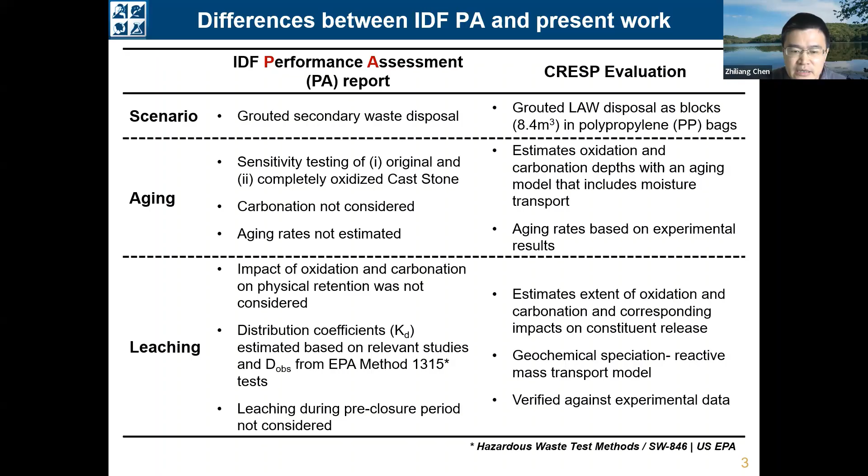So this is just a brief overview of the aging and leaching experiments. For the aging of the Cast Stone, the samples were put into containers and then maintained under different aging conditions for different periods of time. And the aged samples were then used for the leaching characterizations. And based on the experimental results, different models have been developed. And more details regarding the model development can be found in these several papers that we have published.

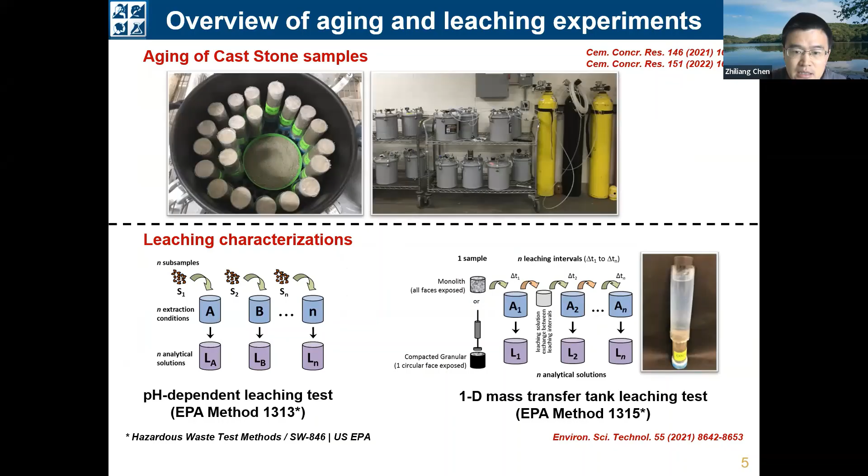And specifically for the aging model, we first developed a drying model to describe the moisture transport between the Cast Stone and the environment. And then we further incorporated the diffusion of oxygen and CO2 into the drying model to develop an aging model. And finally, by extrapolating the aging model with the input of the aging conditions in the field scenario, the aging model can be used to estimate the long-term oxidation and carbonation depths.

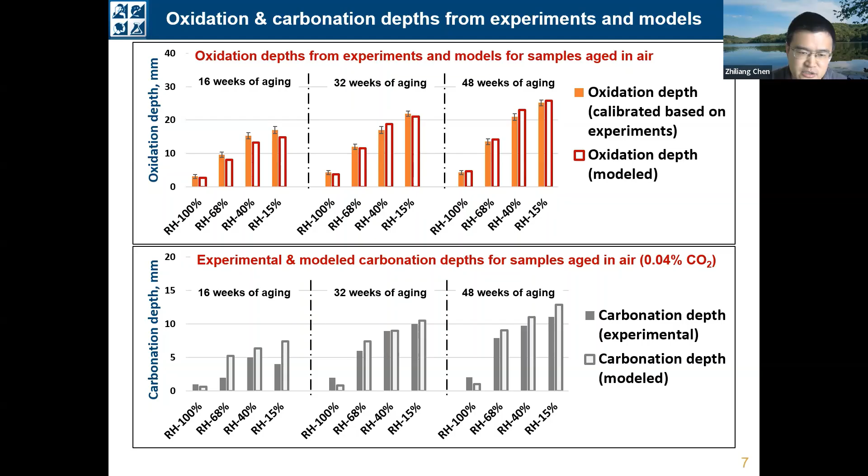And here are some comparisons of the oxidation and carbonation depths from experiments and from models. So at the top are the comparisons for the oxidation depths, and the results at the bottom are the comparisons for the carbonation depths. So as you can see, the modeling results agree pretty well with the experimental results. So that means the aging model that we have developed is well capable of describing the aging processes, including oxidation and carbonation under different aging conditions.

So now we have developed a representative aging model and also a geochemical speciation model. But to estimate the long-term performance of the Cast Stone under field conditions, we still need the aging and leaching conditions of the Cast Stone under the field scenario. And for the IDF at the Hanford site, the Cast Stone will generally go through a pre-closure period for 50 years and a post-closure period for 1,000 years.

And under the pre-closure scenario, the aging condition is assumed as ambient air with low relative humidity of around 54%. And the infiltration rate is estimated as 12 millimeters per year because at this stage, there's no cover at the top of the facility to prevent the infiltration. And under the post-closure scenario, the aging condition will be changed from the ambient air to the soil gas with higher concentration of CO2 and also higher aging relative humidity of around 100%.

And specifically for the early post-closure scenario, the infiltration rate is only 0.5 millimeters per year because at this stage, there is a functional cover at the top of the facility to prevent the infiltration. But for the late post-closure scenario, the infiltration rate will be increased from 0.5 to 3.5 millimeters per year because of the degradation of the cover.

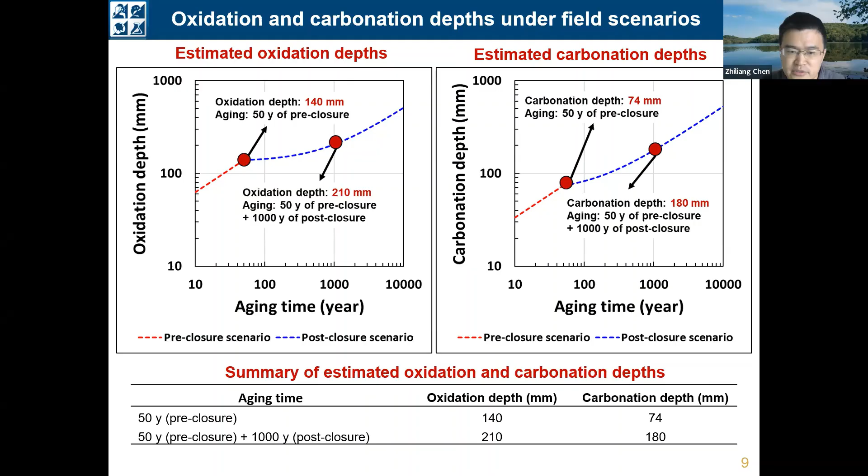The major reason for that is under this pre-closure scenario, the aging relative humidity is only 54%, which is lower than the aging relative humidity under the post-closure scenario. So lower aging relative humidity will facilitate the moisture transport out of the Cast Stone and also facilitate the ingress of oxygen and CO2 into the Cast Stone. So the aging rate under the pre-closure period is much faster compared to the post-closure scenario.

For iodine, we in fact investigated two different systems. On the left are the results for the system without the iodine getter, and on the right are the results for the system with the iodine getter. The getter is assumed to be a silver-containing compound because silver will precipitate together with iodine to stabilize the iodine. So we have some key observations here.

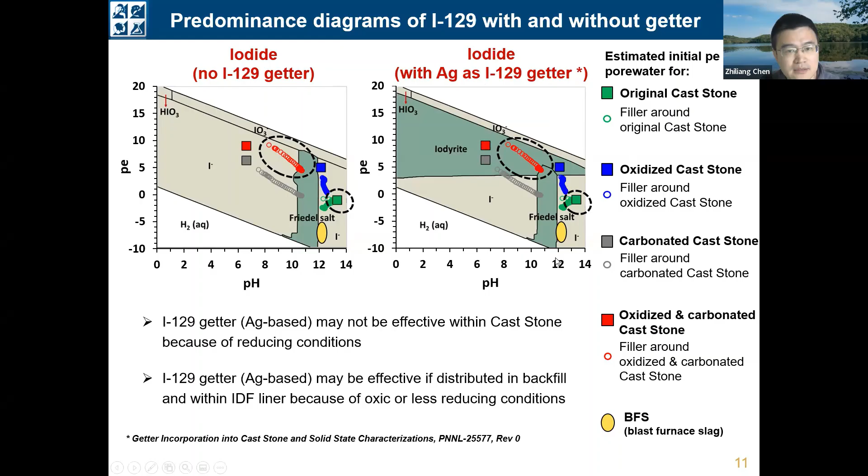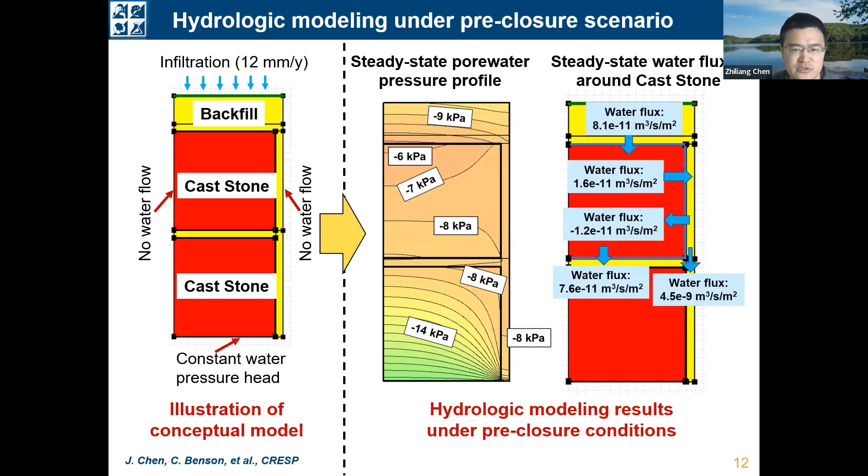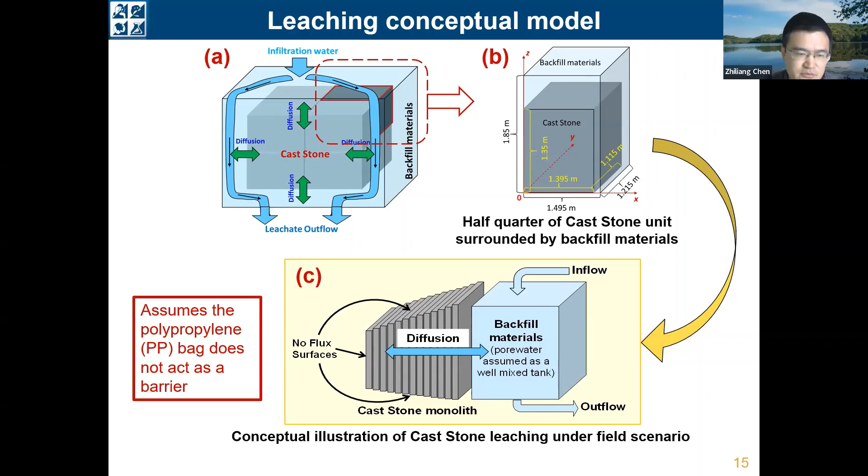And for the leaching modeling cases, we use different Cast Stone materials and different refresh schemes of the pore water in backfill to conduct sensitivity tests. So specifically, we have 3 different Cast Stone materials, including the original Cast Stone, the oxidized Cast Stone, and also the oxidized and carbonated Cast Stone. And each Cast Stone material is in different water saturation conditions, including the dry case, median case, and the wet case.

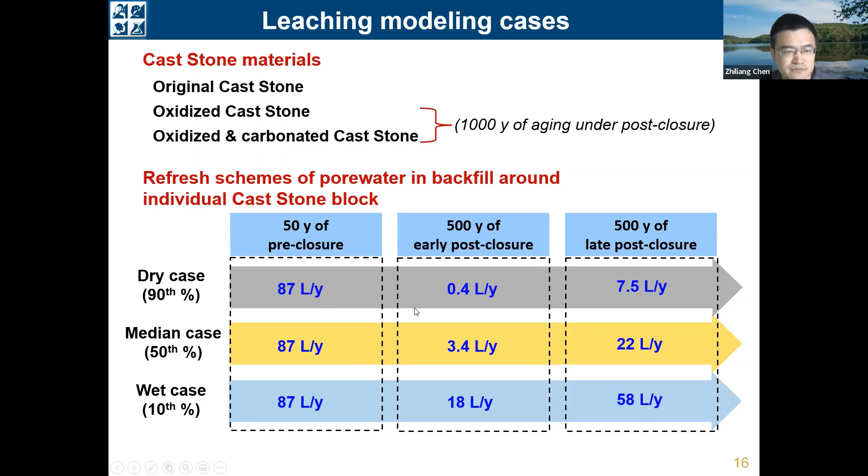And here we have the modeling results regarding the fractional cumulative release of the technetium. So the results on the left are the release from the original Cast Stone, and the results in the middle are the release from the oxidized Cast Stone. And on the right are the results for the oxidized and carbonated Cast Stone. So the top 3 figures are the results of the total release, and the bottom 3 figures are the results of the release to the vadose zone.

So the release to the vadose zone is derived by subtracting the release of the first 150 years from the total release, because the release of the first 150 years is assumed to be completely collected by the leachate collection system sump at the bottom of the facility. So in each figure, you can see 3 different lines indicating the modeling results for the dry case, median case, and wet case.

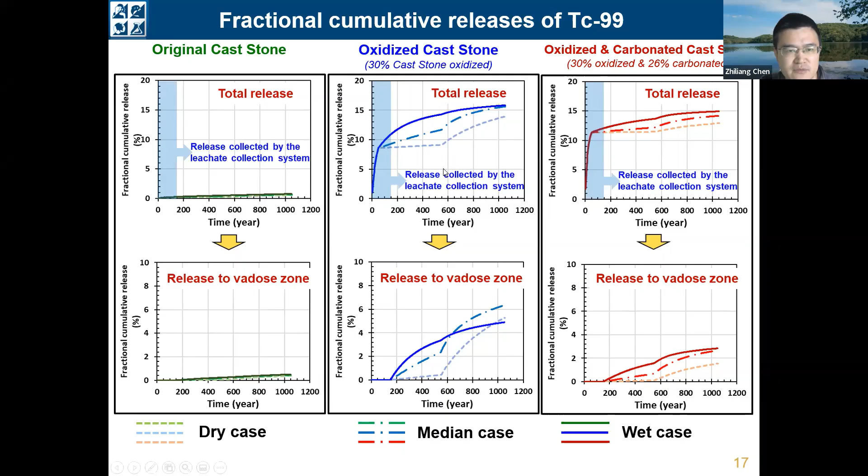So if we take a look at the total release from the original Cast Stone after 1,050 years, we can see that the total release is less than 1%, which indicates good retention ability of the Cast Stone for the technetium. But we will also notice that after the oxidation or the carbonation of the Cast Stone, the release rate has been dramatically increased.

And here I summarize the release of the technetium and iodine for different cases. For the technetium, you can see that the release from the Cast Stone is lower, less than 1%, but oxidation and carbonation increases the release by a lot. And for the iodine in the system without the getter, the release is much higher compared to the technetium. And also you can see that oxidation and carbonation will further increase the release rate.

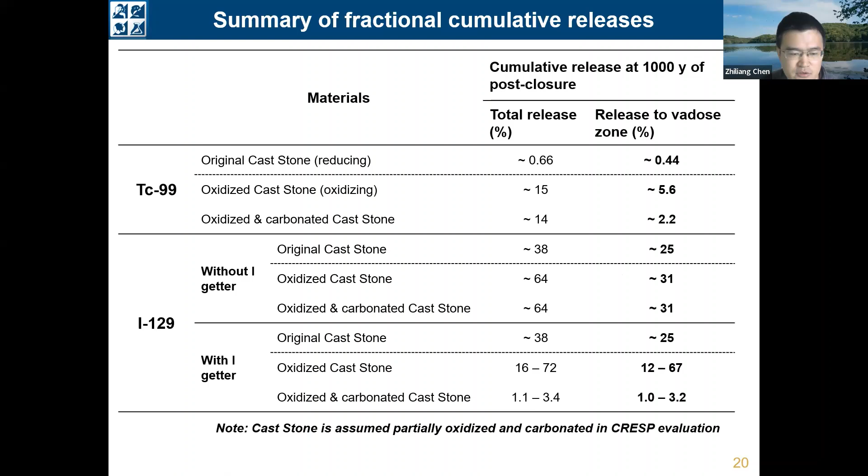Yeah, and finally, we have some takeaway messages here. A large fraction of the aging, including the oxidation and carbonation and contaminant release, occurs during the pre-closure period, within a relatively short period of time of 50 years. And during this period of time, the IDF liner and the leachate collection system are functional.

And also the combined oxidation and carbonation are detrimental for technetium retention, but are beneficial for iodine stabilization in the system with getter. And finally, the getter may not be effective within the Cast Stone because of the reducing conditions there, but it may be effective if it's distributed in the backfill or in the IDF liner because of the oxic or less reducing conditions there.

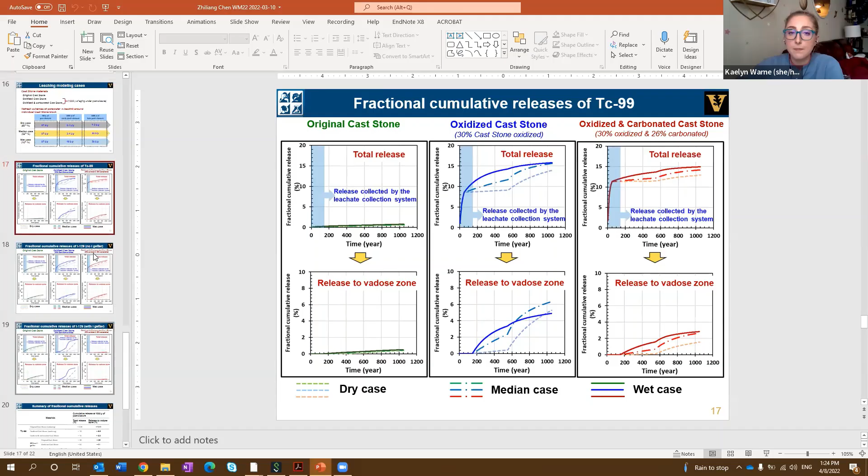You mean? Yeah, it seems across a lot of your graphs, the total release and the release to the vadose zone starts to change in projection at around 600 years. Do you know why in the modeling it's showing that? Oh, you mean around this point, 600 years? Yeah, because here we have 3 different leaching scenarios. Firstly, maybe here is more clear.

Okay. Firstly, we have a pre-closure period for 50 years, and then 500 years of early post-closure, and finally 500 years of late post-closure. And for each period of time, this is the water flow rate around the Cast Stone. So the water flow rate for the pre-closure is the same, kept constant, but the flow rate for the early post-closure and the late post-closure are different for different cases. This is the dry case with the lowest flow rate, and median in the middle, and the wet case with

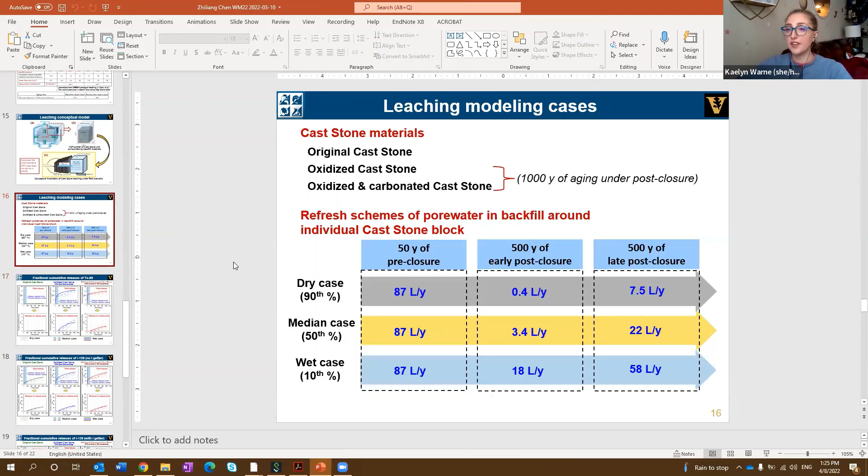highest flow rate. So yeah, at the time around 600 years, you can see that the flow rate will be changed by a lot, so that will impact the release rate. So that's why you observe these changes at this time point. Oh, great, thanks. I think I just missed that time change. Focused on the 50 years. A lot of information. Yeah. Good call.

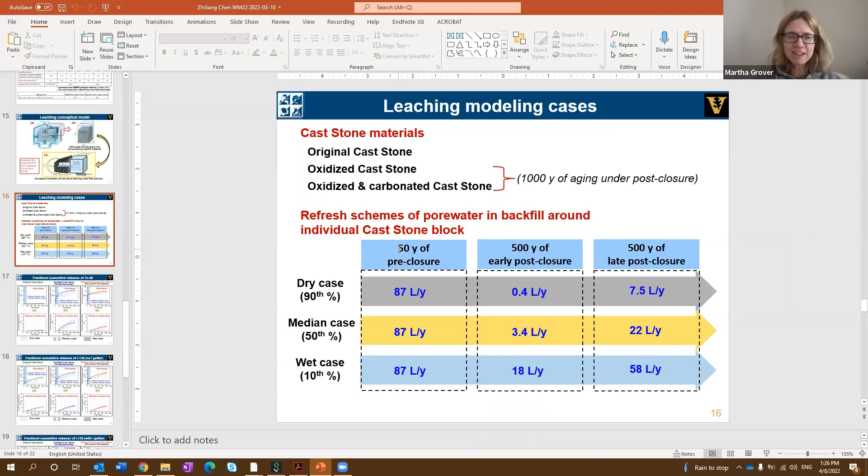Other questions? I was wondering what happens to the leachate in the early period. When it's collected, do you know what is done with that? You mean this early stage? The first 50 years, you said it's collected. Yeah, because the liner is still functional, and they have a sump at the bottom of the facility to collect the leachate. So we assume there's no release of the contaminants into the vadose zone.

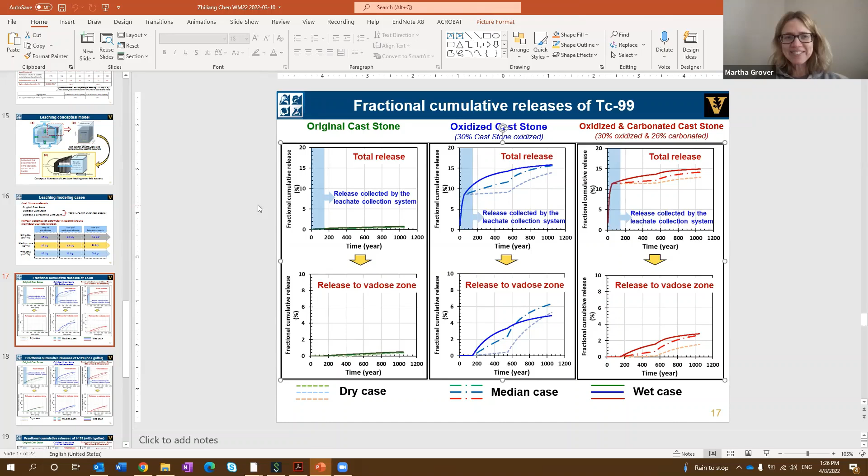So yeah. Is it put back? Would it be put back into grout, do you think? Do you know? You mean the treatment for the collected leachate? Yeah. I don't know. I believe it goes to ETF. I think it goes to the effluent treatment facility. I don't think they try to put that back in the tank farm.

Yes, might recycle. It would be pretty dilute, and I don't think that they would put that back in the tank farm. They have treatment facilities that they're building for it, it's called the effluent treatment facility that goes into the solids facility, the water part. So they treat it through ETF. Was there another question? I think when I started talking, someone else started talking.

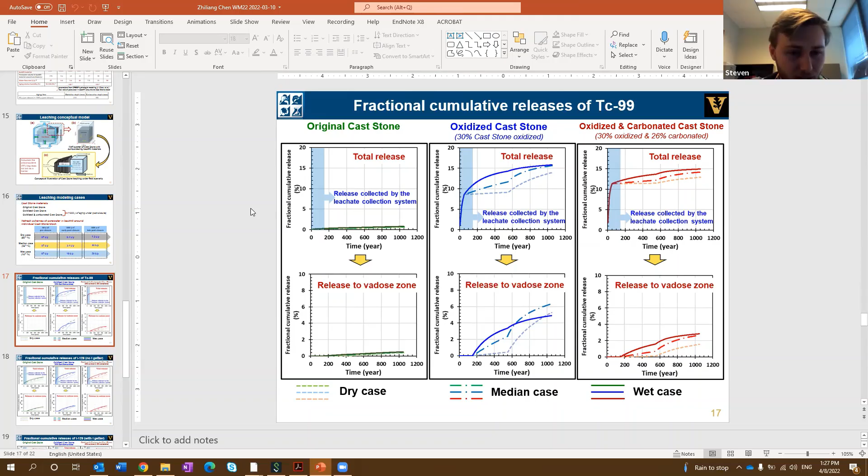Yes. Hi, Zhiliang. Thank you for the talk. I had a quick question. It was earlier in your presentation. I think it was something about predominance of technetium or something like that. You had these plots. What is the y-axis? You may have mentioned this, I just didn't catch it. The y is the pe value.

What is the pe? It's like the activity of the electron in the system. Okay. The little p like negative log, like pH, but for the electrons, not the hydronium ions. Okay, thank you. I didn't realize what that was when you were presenting. So this is similar to a Pourbaix diagram where you'd have an Eh-pH. And so it's kind of the redox state on the y. Okay. Thank you.

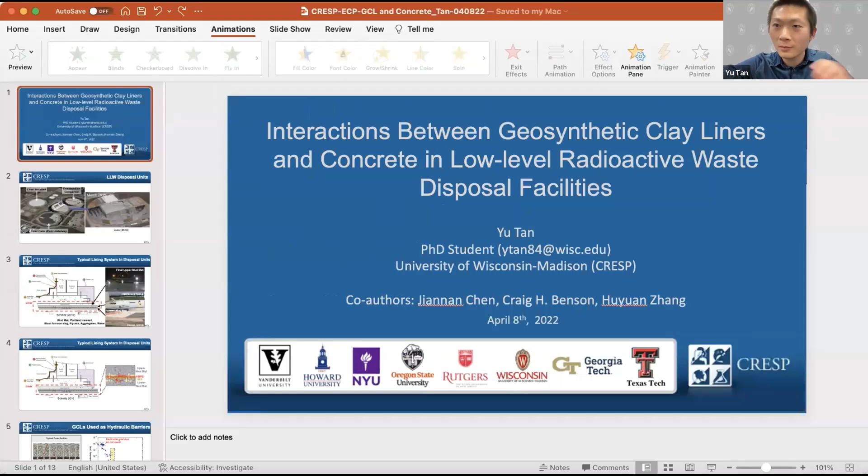Hello, everyone. It's my honor to give a presentation here. My name is Yu Tan, a PhD student from University of Wisconsin-Madison. My topic today is the interaction between geosynthetic clay liner and concrete in low-level radioactive waste disposal facilities.

As I introduced last time, those disposal units were built for permanent disposal of low-level radioactive waste. Those are huge units built of concrete, and they mix the low-level radioactive waste with cementitious material and pour that material into the disposal unit for permanent disposal of the waste. At the bottom, there is a lining system to intercept the leachate. So today I'm going to talk a little bit about the lining system in the disposal unit.

So this graph is the drawing of the bottom of the disposal unit. At the very bottom, we have a lining system containing a layer of HDPE and the GCL, sandwiched by two layers of mud mat. HDPE is a typical plastic. It's usually impermeable, and GCL is a geosynthetic clay liner. It's usually used as a hydraulic barrier in the lining system, and there are two layers of mud mat.

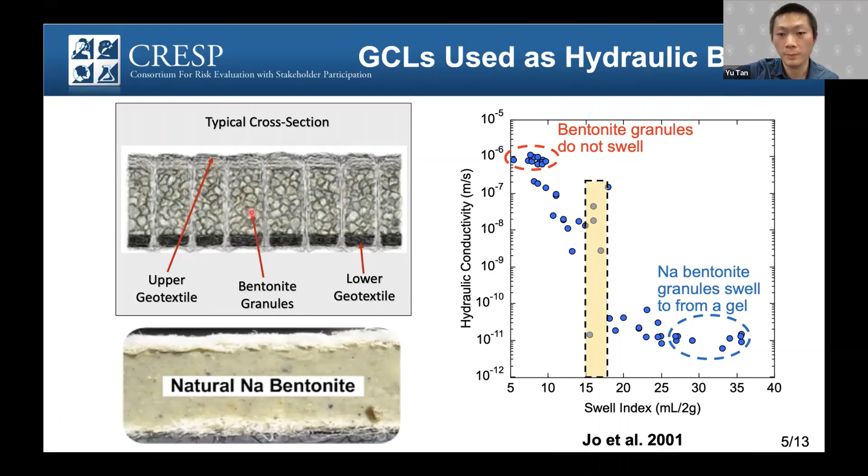So as we mentioned, the key factor for the performance of GCL is the transformation of the granular bentonite to the gel structure. So it depends on the swelling of bentonite. We usually use the swell index test to evaluate the swelling of bentonite and also as an indicator for the hydraulic conductivity of GCL. For the swell index test, we usually have this graduated cylinder, and we pre-fill the solution we would like to evaluate into the cylinder.

And we have 2 grams of dry bentonite. We gradually add the bentonite into the cylinder and let the bentonite swell. Finally, when it reaches equilibrium, we record the volume of the bentonite at the bottom. This is the maximal volume that the bentonite can reach in the specific solution. Then we report this volume of bentonite as the swell index. It indicates the swelling capability of the bentonite.

So in this column, if we use sodium chloride solution and run the test with sodium bentonite, it will generate high swelling. A high swell index means high swelling, and it will yield very low hydraulic conductivity, 10⁻¹¹. But if we test the same bentonite using calcium chloride solution, it will develop a low swell index and yield high hydraulic conductivity. So it becomes permeable. It's not able to contain the leachate.

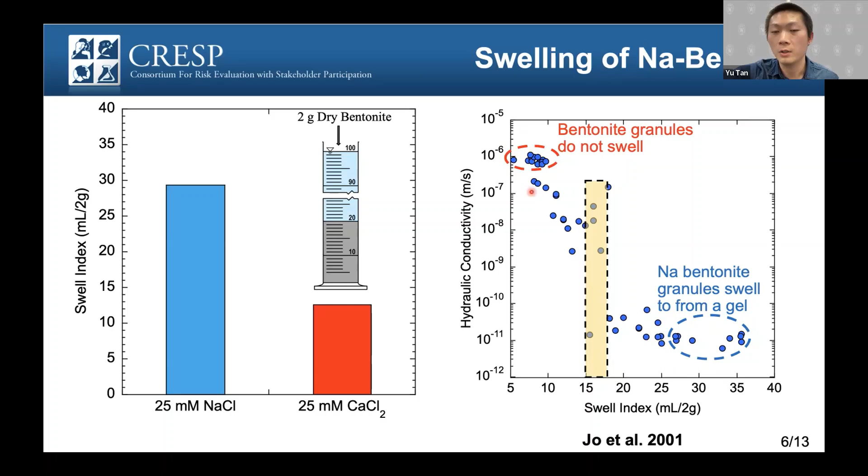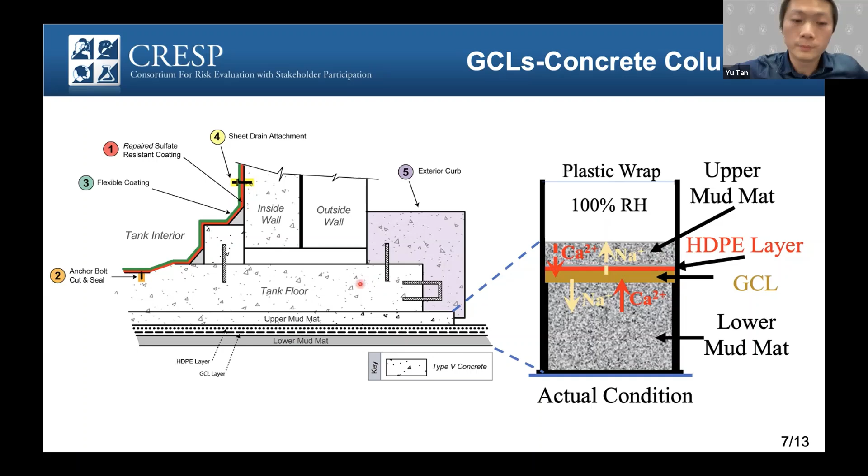So this is our test. We set up the column test in our lab to simulate the lining system in the field. First, we have the lower mud mat at the bottom, put the GCL on top of the lower mud mat and a layer of HDPE on top of the GCL, and we pour concrete on top of the HDPE geomembrane to simulate the lining system in the field.

And also, since we were concerned that the GCL is pretty thin, only 1 centimeter, we would like to learn more about what happens in the cross section of the GCL. So we created a 4 centimeter thicker GCL in our lab. We call this the thicker GCL scenario. The other conditions are the same as the actual condition that we set.

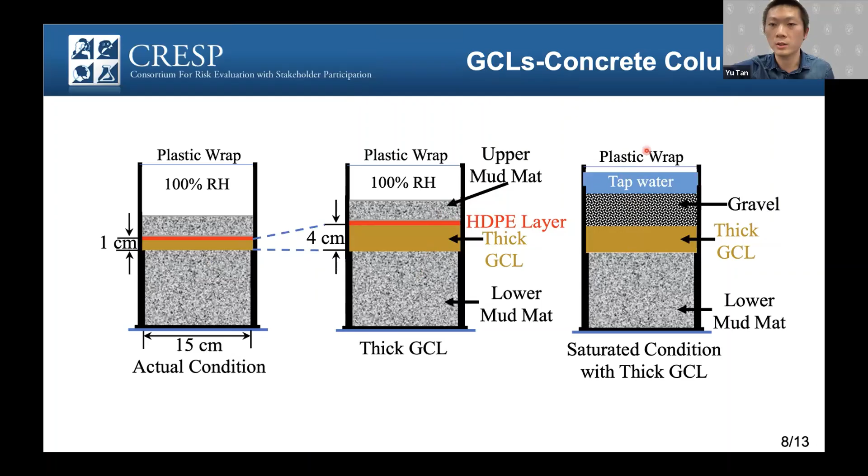And finally, our hypothesis is the interaction between the GCL and the lower mud mat, because the HDPE geomembrane will cut off the interaction between the GCL and the upper mud mat. So we take off the upper mud mat and the geomembrane and pond water at the top to accelerate the effect. So this is the worst case in our conditions. We call it the saturated condition with thicker GCL.

So this is our result. First, we believe that the GCL will absorb water from the concrete to hydrate. If the water in the concrete is calcium rich, it will affect the swelling and hydraulic conductivity of the GCL. So first we measured the water content of the GCL after 300 days of interaction. We set up a column, let it sit for 300 days, took the sample out and measured the water content. The water content of the actual GCL is the same as the fresh GCL. Not much hydration happened.

So this is the figure of the actual GCL. It still has some transformation, but we found that there are cracks between the bentonite. If the bentonite can swell, it can heal those cracks and become impermeable. If it cannot swell, we can imagine that water can flow through those cracks and yield high hydraulic conductivity. And for the thicker GCL, the water content increased a little bit compared to the fresh GCL.

And for the saturated condition, we put water at the top to make the thicker GCL saturated. So the water content is high, and this is the figure of the GCL after 300 days of interaction. You can see that it formed a gel structure. It should be impermeable.

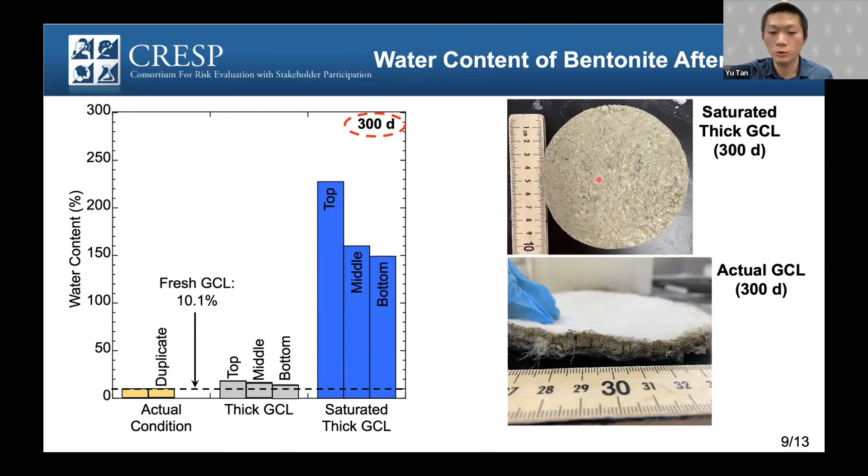It means that after 300 days of interaction, the hydraulic conductivity of the GCL is still pretty low, in the range of 10⁻¹¹. So the effect of concrete on the GCL is not quite significant.

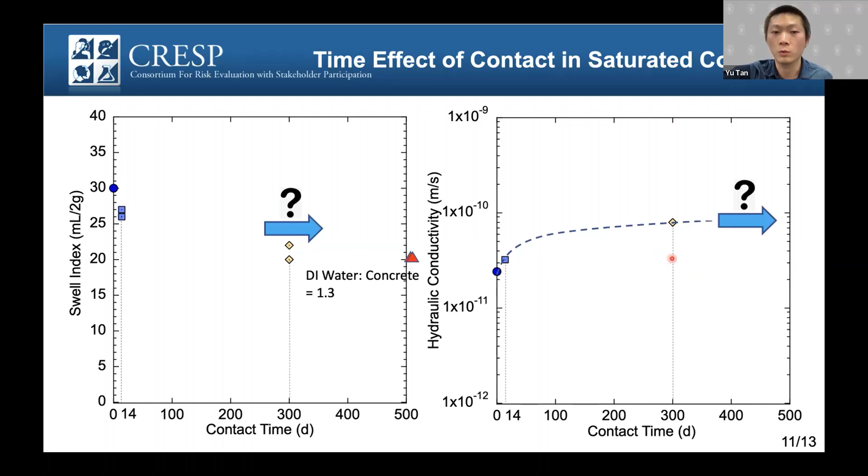We found that the swell index in the pore water of concrete is still comparable with the swell index after 300 days interaction in the column test. It means that in the saturated condition, the interaction between the concrete and the GCL may have reached equilibrium. So if we run the column test for a longer time, we may get a flat trend at the end. So our results are favorable that the GCL works pretty well based on our results for now.

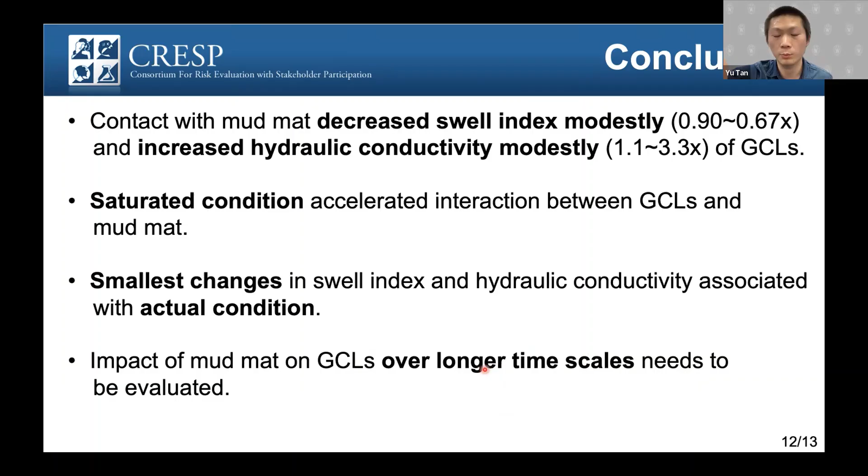So these are the conclusions. First, the contact with the mud mat does have some effect on GCL. It decreases the swell index and increases the hydraulic conductivity of GCL. The saturated condition accelerates the interaction between GCL and the mud mat. And the smallest change happens in actual conditions, so it's favorable that our disposal facilities should work pretty well. But over a longer time scale we still need to evaluate, because mixing the concrete and the water to represent the pore water in concrete is still not quite accurate.

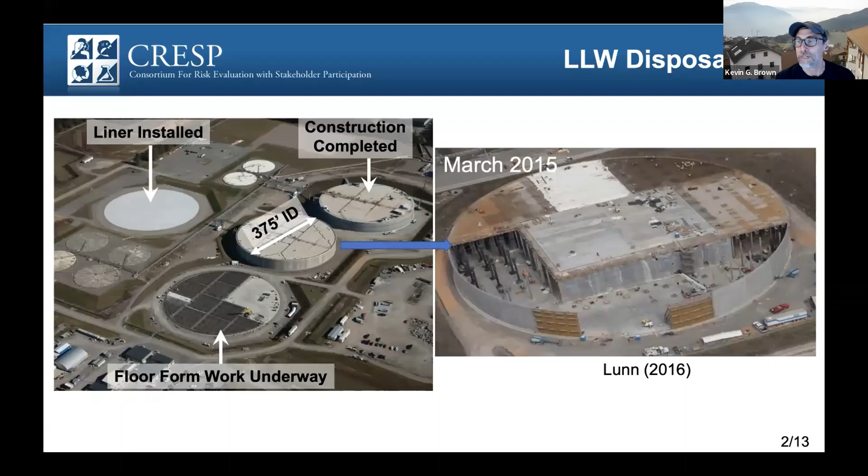They took a water tank design, but the water tank people forgot to tell them that water tanks leak, which is not a good idea when you're putting a waste form in it. So they've had to do some work on sealing them. And then the double base mat layer helps collect the stuff that comes out. So this is very important. And then at Hanford, we're proposing something similar for study for their low activity waste.

And then the question I asked at Waste Management was the uncertainty in the line that was drawn through the points that he showed earlier. Craig is smiling because poor Craig gets asked this by me every time he presents. But when you're working with performance assessments, you have to start thinking about the uncertainties, especially when projecting forward in time. So it was a very good talk.

So for the uncertainty, we are going to run more replicate tests to add more points on the graph to increase our confidence in the trend that we obtain from the graph. Yeah, that's a good point. Thank you, Kevin.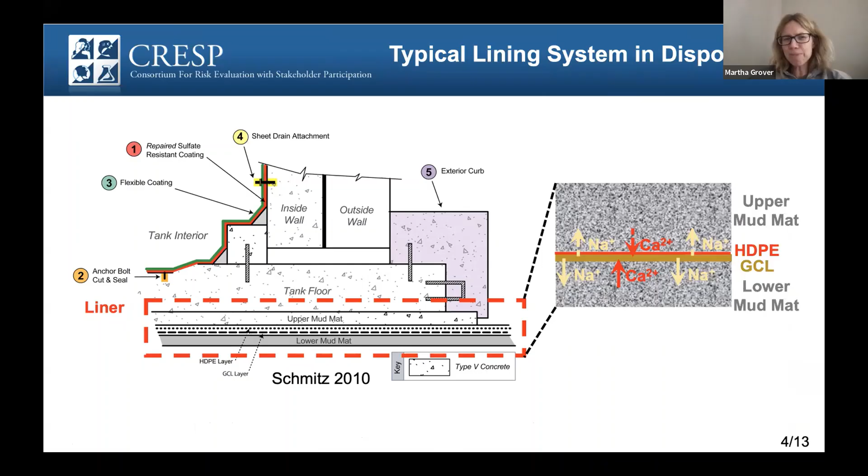Do you think about doing accelerated lifetime tests, like at a higher temperature? Sometimes, when things are really slow, people do accelerated lifetime tests. Is that something you're thinking about? Yeah, that's a very good point, but we have not run the test in our lab. So right now we are planning to run some leaching tests to get a more reliable synthetic pore water in concrete and evaluate the effect of the GCL.

But for accelerating the degradation of concrete or GCL, we have not reached this point right now. And you have to remember the acceleration only works if you don't change the mechanisms. Yeah, agreed. So in glass, you can accelerate temperature up to about 100 degrees C, and then the mechanisms change, so you get useless data after that. Cementitious stuff is even a little more complicated than something like glass, which is considered amorphous, even though it's not. It's quasi-crystalline. Osmotic swelling of the bentonite is sensitive to temperature as well. Right. So you can change the mechanism.

Yeah, go ahead. So I was just gonna say, I had a similar question about the accelerated aging test, although my thoughts are in the pressure area, considering you're gonna have such a heavy load on top of it. Have you done any sort of induced pressure testing on the mud mats? Yeah, we didn't. I think the pressure is also a good point, but we didn't run the pressure test in our lab.

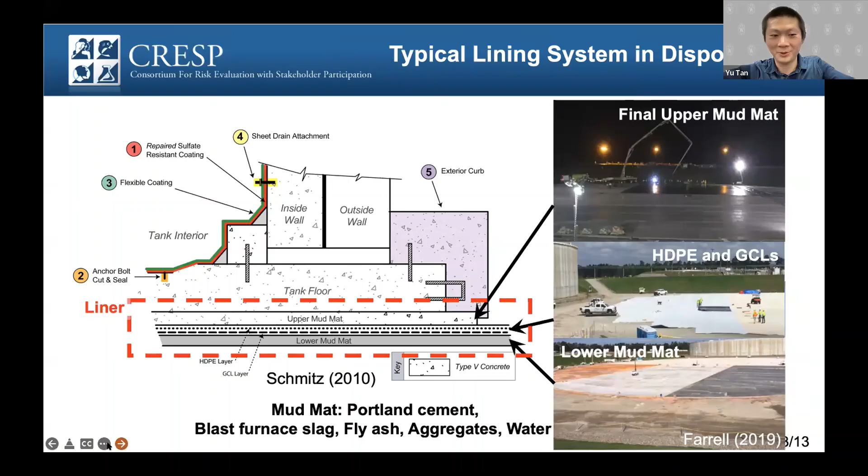So good, it's Masters time. We have to do golf claps, right? I used to live there. It is Masters time. Yes.